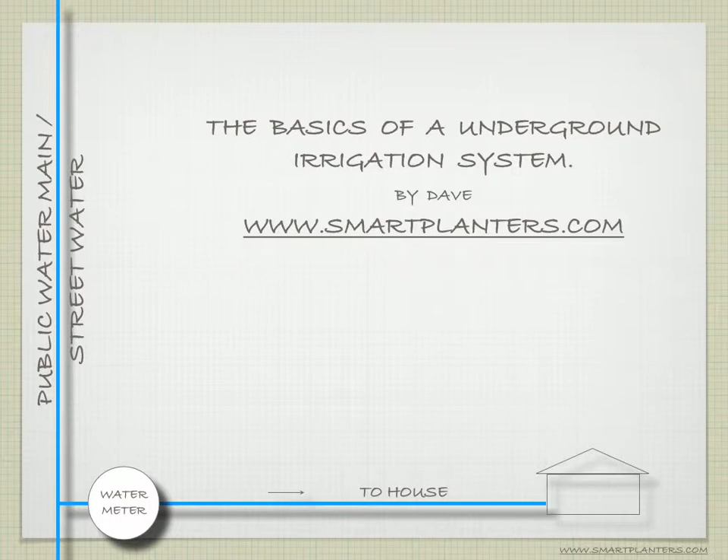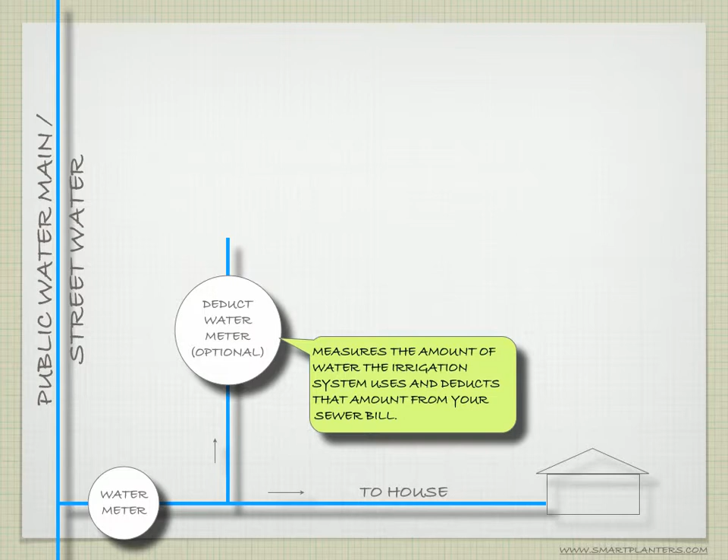For this application, I'm going to assume that we're tapped into a public water system, and the first component is going to be a deduct water meter. This is optional, but what it does is it measures the amount of water the irrigation system uses and deducts it from your sewer bill. So over time, it'll eventually pay for itself.

The next component is going to be a backflow prevention valve. This is something that you must have, because if the public water system ever lost pressure, fertilizers, pesticides, whatever's in your yard isn't going to go backwards into the public water system and contaminate your neighbors down the street. So it's a must-have.

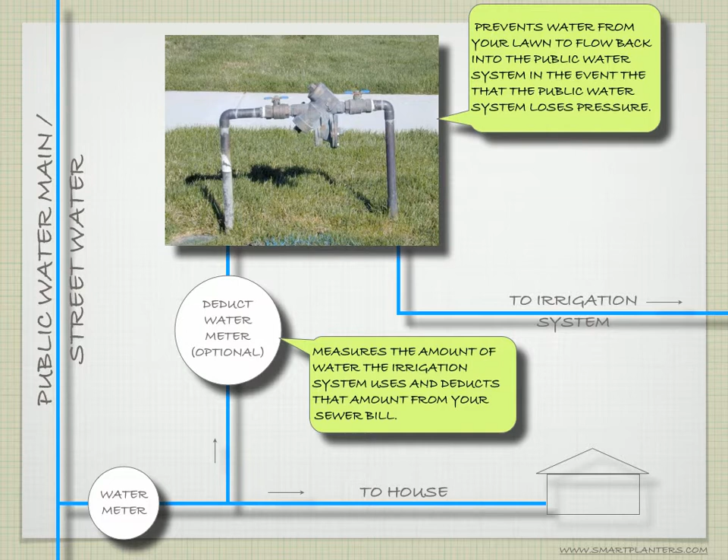Next, it goes to the underground portion of the system, which is composed of control valves, your lateral lines, and then your sprinkler heads. For this example, I'm just going to use 2 zones, but a small residential property might have 5-6 zones, a commercial property 50-60 zones.

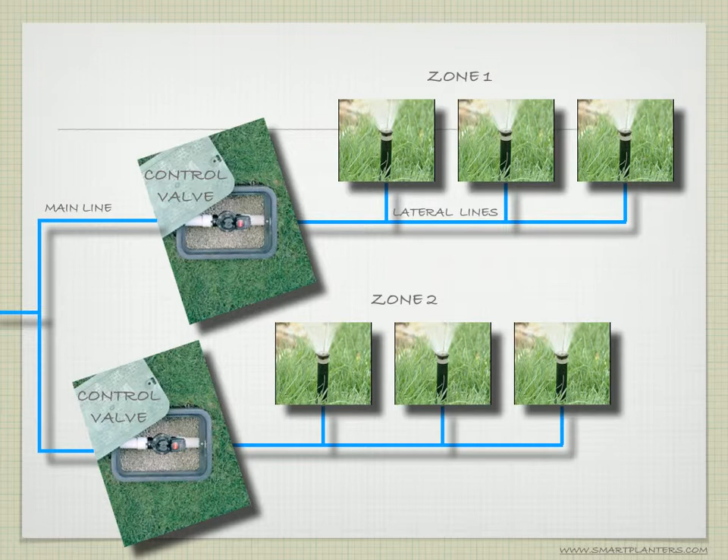Each of these zones, each of these control valves, is controlled by a timer, which is basically just a small computer that schedules when and how long you want each zone to irrigate for.

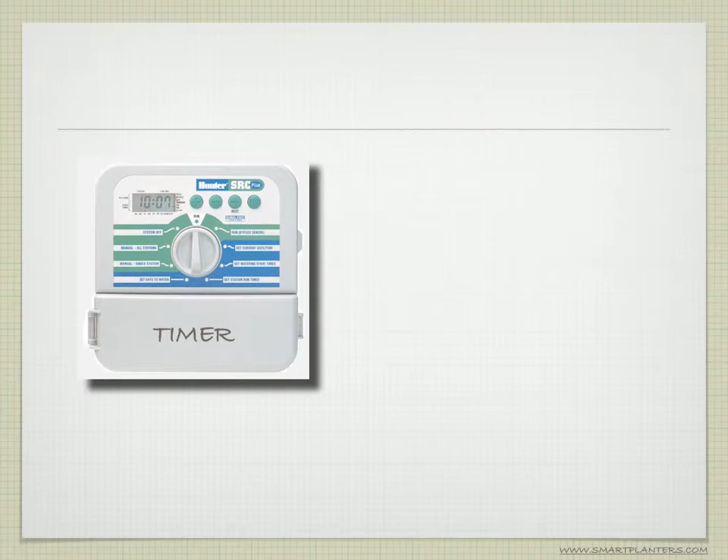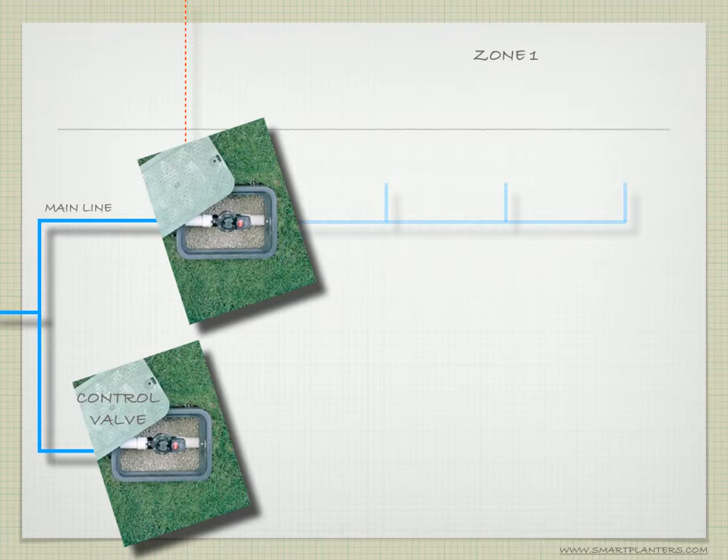So let's say you want to have your lawn watered Tuesday at 6 o'clock in the morning, and you want zone 1 to irrigate for 15 minutes. The timer is going to send a low voltage current to the first zone, zone 1, to that control valve. The current opens the control valve, allows water to flow through the lateral lines, thereby pushing the sprinkler heads up out of the ground, which obviously waters your lawn.

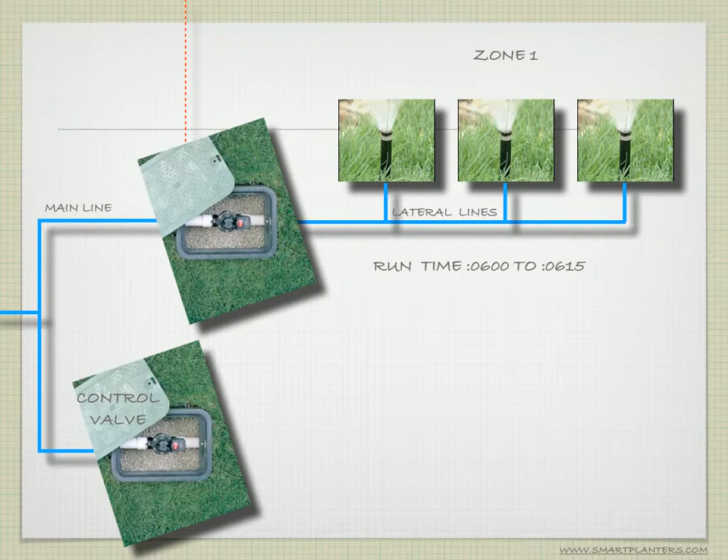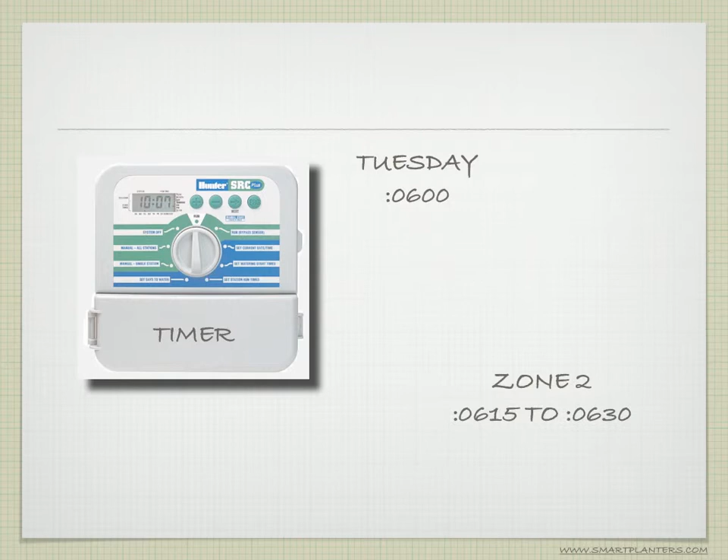After 15 minutes, the timer stops sending current to the control valve, which shuts the water off for that zone, and the sprinkler heads retract back into the ground. Then the program continues. It goes to zone 2, and it's set to water that zone for 15 minutes.

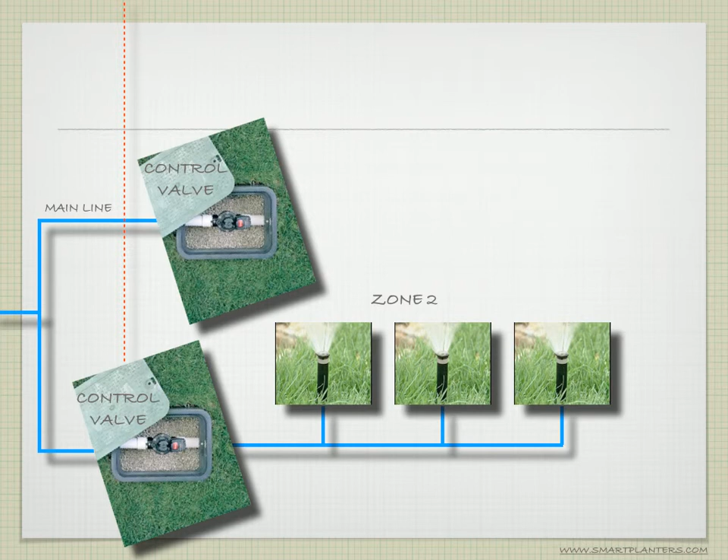And that's basically it. An irrigation system is actually very simple. There's not much to it. Hopefully this takes some of the mystery out of it and gives you a little bit of understanding of how it works.